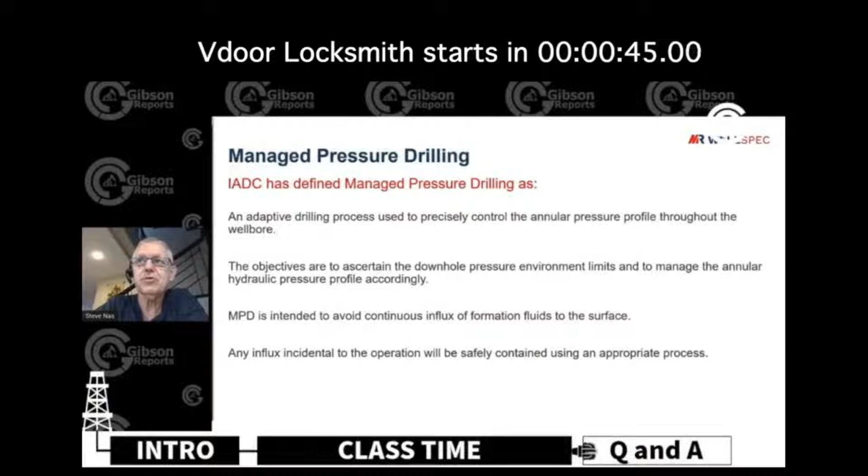The key is being transparent with our clients in this case. So tell them what happened. If we had a failure, tell them exactly what happened. Whether it's our fault, whether it's whatever the issue was, we need to be transparent.

I think it's very important for everyone in the industry to know what's out there and kind of what's happening downhole as well. I've probably worked on over 40 different performance limiters in my career. If I miss any of those, and the computer is raising weight on bit, I have a train wreck. The computer's going in the ocean.

Here's your new colors, here's your new thing. We don't do that at all. Here's the tattoo you need to get. Yeah, here's the tattoo. Sorry about the last one. We used to fake that all the time.

Hello, everyone, and welcome to the show. This is the VDoor Locksmith Show, where we are unlocking the secrets to success in the oil and gas industry. One interview, one technical presentation, which is what we've got today, and one technical screw up at a time.

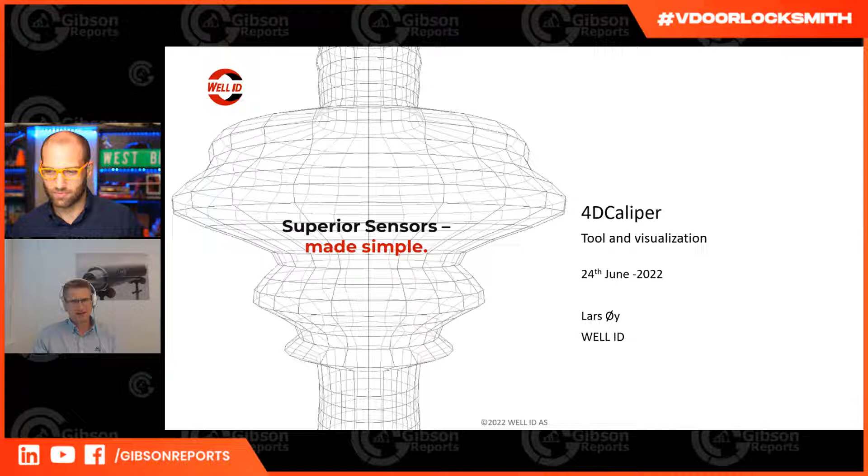There we go. Yeah. So I'm from Well ID. It's a company started 6 years ago, and we are working with LWD sensors. And the idea behind WellID started in 2016. I was working with rig technology, and I thought, what's missing in the LWD market? I'd been doing LWD and directional drilling in the past, and what I always thought was missing was calipers. There were so many simulating a borehole, discussing and using gut feeling, but hardly anybody measured it. And especially for big boreholes, there was nothing at all that actually worked.

And then intuitive visualization of logs. There were scribbly lines, and people were complaining constantly about the logs. They were hard to read, hard to understand, and again, people were rather using their gut feeling instead of trusting the sensors. So what I always heard was that only big companies could develop a new sensor, do something new. And I thought, I think they're wrong. Let's just start WellID and beat the big companies in new technology. So that was back in 2016.

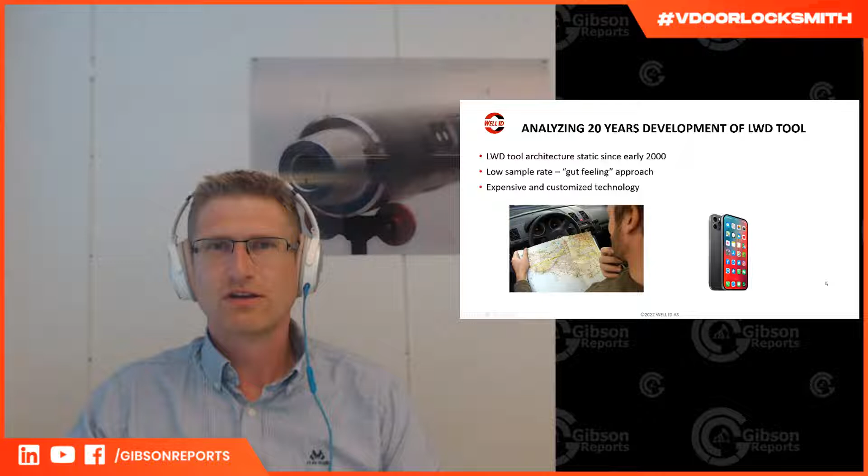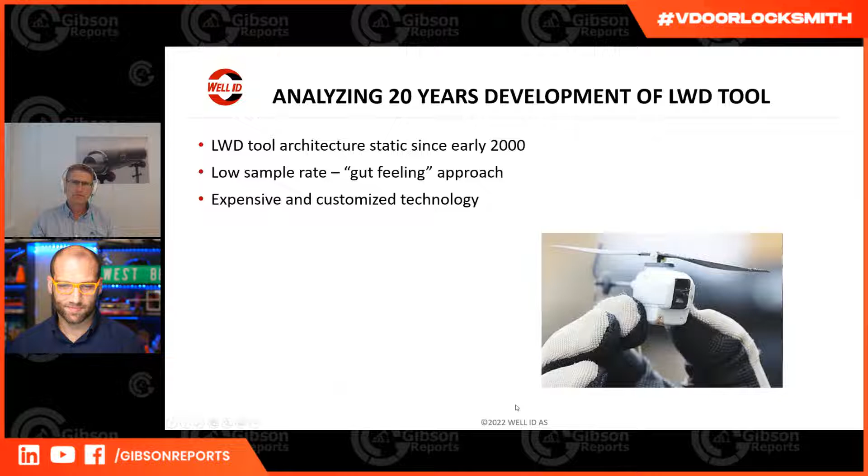And that was the approach we had. This was how it was done in 2000, and now everybody uses GPS and cars start driving by themselves. And then you have the drone industry, aviation, space, medical, car. They all acquire sensors that are accurate, reliable, can handle harsh environments, low cost. So there's no need for the downhole industry to customize, to develop themselves. And that was the approach we had for thinking it's possible to do something new.

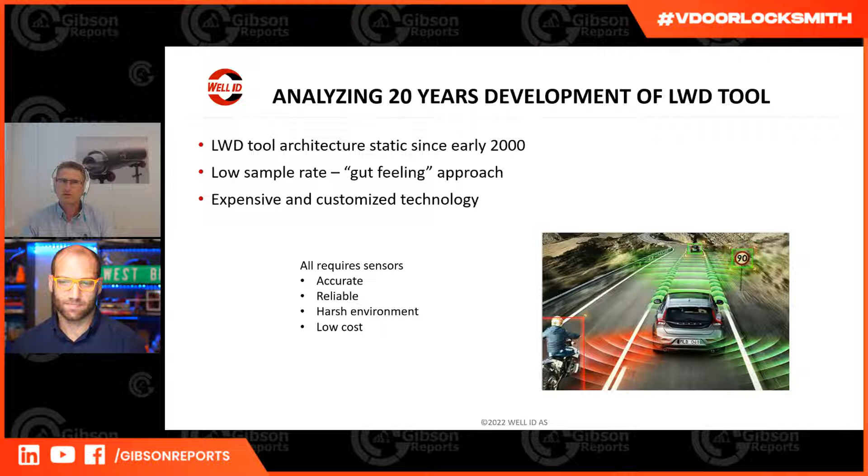And then how to make an LWD caliper and a new visualization. We combined lots of things that we could find. That was the first approach, and then cooperate, find people we could make a win-win with, and then we had to develop the rest. And so far that's been a successful approach. If we had tried to beat Schlumberger with 100,000 people, we would never succeed. We had to rely on finding off-the-shelf solutions and cooperate, be flexible, be agile.

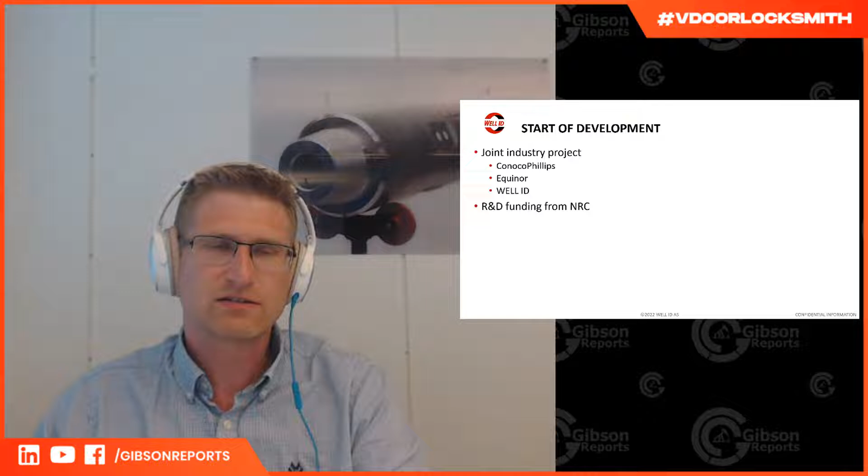So when we started WellID, it was a joint industry project. We got ConocoPhillips and Equinor supporting us, both financially and technically, and we also got some research funding from the Norwegian Research Council. The support from the oil companies also proved that they thought our value proposition and the need for the caliper was real, because lots of startups develop something that industry actually doesn't need. I think that was very important, to see that they saw the same value proposition as we did.

The caliper is a radar-based LWD caliper. It's for 12.25 to 17.5-inch boreholes. It has its own battery and memory, so it can be put in any BHA. The sample rate is 100 to 200 samples per second, so you easily get into gigabytes of memory instead of the kilobytes that used to be the standard.

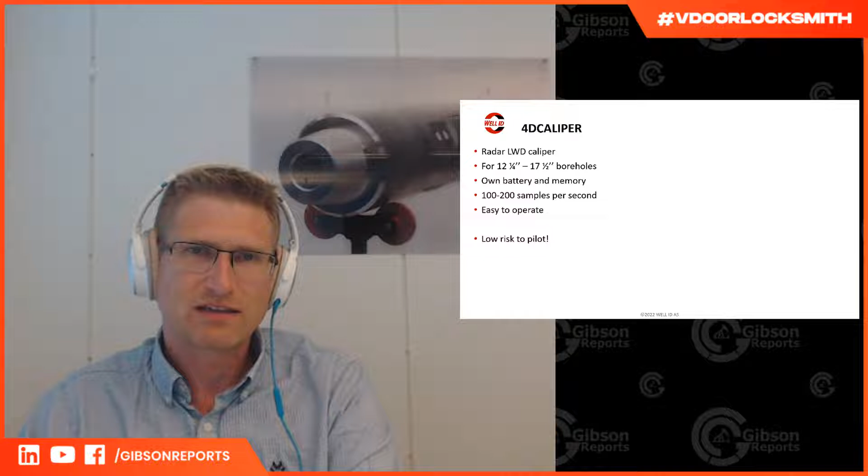It was always an aim to make it easy to operate. This extremely complex tool that you need long manuals and in-depth understanding to operate, I think that's history. One very important aspect for us was to make it low risk to pilot, because if it had been high risk to take the first run, no one would dare to send it downhole, and we would just end up with a tool on the shelf.

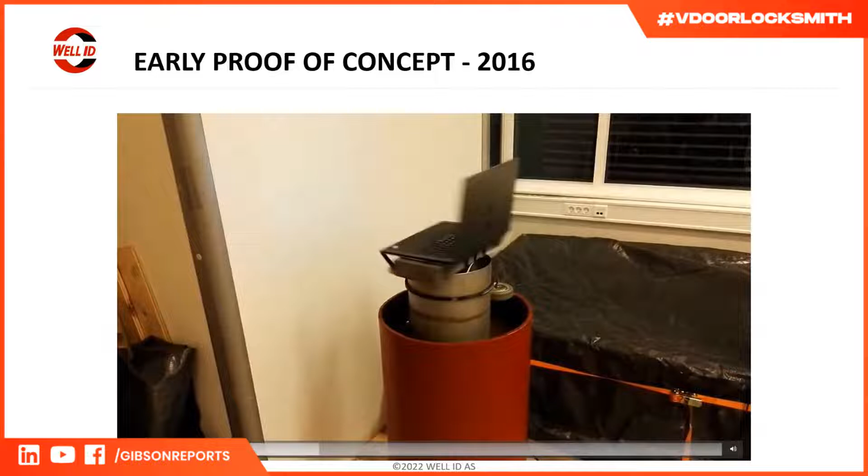I found a video back from 2016, and that was before we had any downhole electronics. We had a radar sensor, and we made a mock-up of an LWD tool, put that in a casing with mud, hooked it up and got measurements. Of course, there was a big discussion about whether we could fit a laptop down this LWD tool, but we just used gaffa tape and put it on top. So the principles were the same as today's tool, but the wrapping was very different.

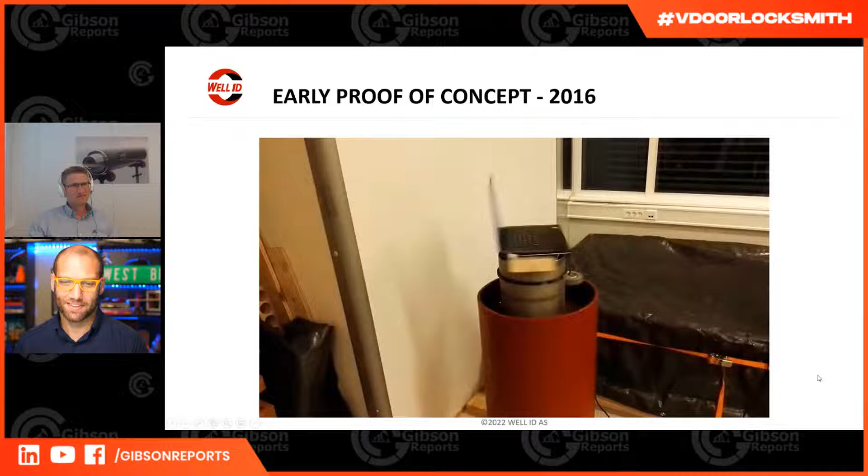Here you see some of the development phases that we have been through. The first proof of concept was a little more sophisticated, put in a clean workshop, and then we got attention and support for further development. Then it was into making the LWD tool and running it on a test rig onshore in very gentle conditions. The final phase was sending it into a real, challenging well with high pressure and high vibrations. That was the last development phase we had on the hardware.

So just shoot in if you have any questions. I'm always interested in discussing these things.

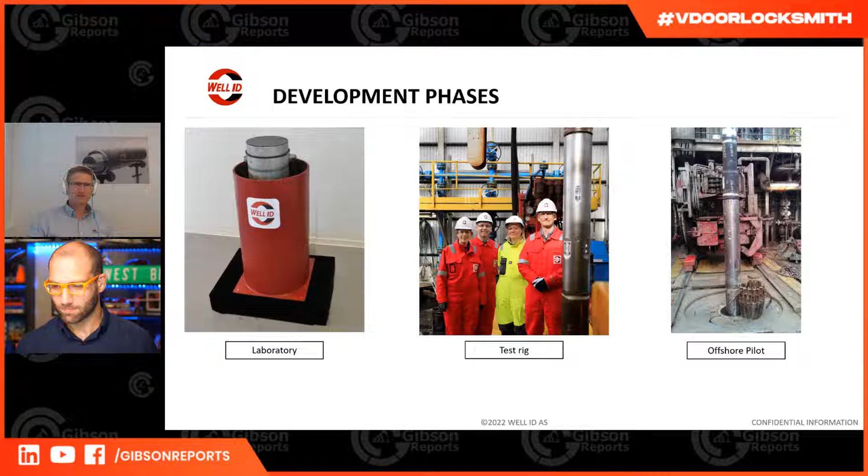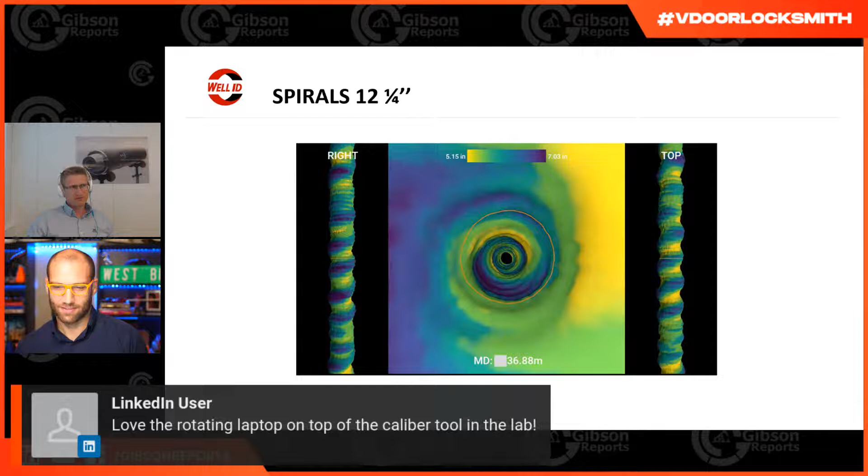This is measurements from a 12¼-inch section, and it was very surprising to see all the spirals here. It was anticipated that there could be spirals, and I've heard about it in the past, but seeing it, measuring it, and seeing different sections have different spirals was just an eye-opener. In this case, it was drilled with an RSS tool, and when they were building angle, there was a different pattern than in the tangent section. So we see how different tools and different bits behave. We can nail down the commands they send to the RSS and see how that creates a response. So it's very interesting to see the downhole picture.

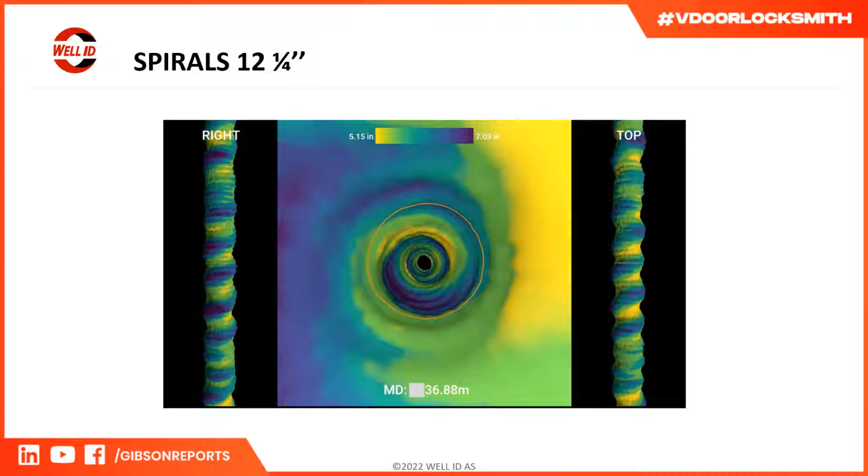Among the spirals we see here, there's one that is 95 centimeters long. Sorry, I've been a little out of imperial units now, but around 3 feet. You can see that as a small edge here, and that relates to the bit to first stabilization point on the RSS. Then you have a longer spiral around 7 to 9 meters here, and I think that can be related to the cruise control or hold function on the RSS. Lars, how far is it from peak to peak on those? What was the distance?

Peak to peak we have a quarter inch on the small ones. So it's not a big spiral, but this adds friction over time, and it adds a lot when you have thousands of feet. Then what is the consequence of this? You can run liner through here, but as you get deeper and deeper, friction increases, and then you'll ultimately stop. So when we see all this pattern, we wonder how far you could have gone if the bore had been straight.

And we also see there's so many simulating on this that don't take the geometry into account. They probably add a friction factor and they fudge that to fit the torque and drag. But I think it's the wrong approach. I think the right approach would be to have the geometry in the calculations, and then the friction factor reflecting the friction between the formation and steel, not compensating for geometry.

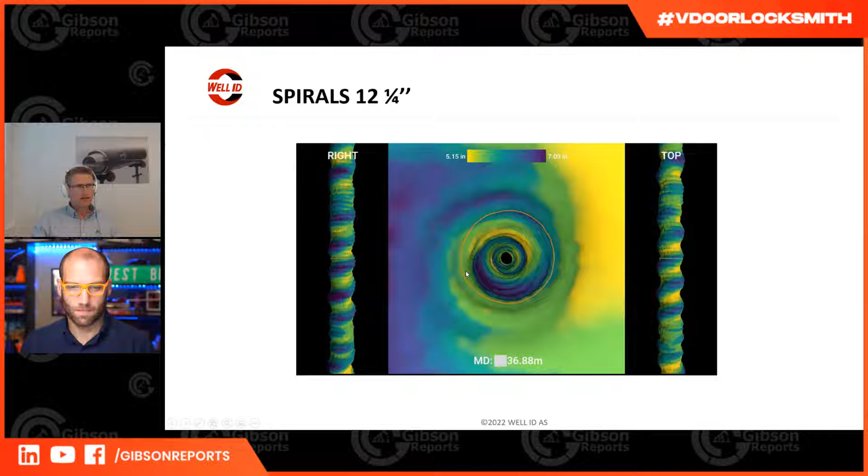And this is a 3D view that we have made. And this is an odd one. You can see it as a video. This full screen. Yeah. So if you scroll fast, you see the spiral going there in a circle. And then you see the smaller ledges.

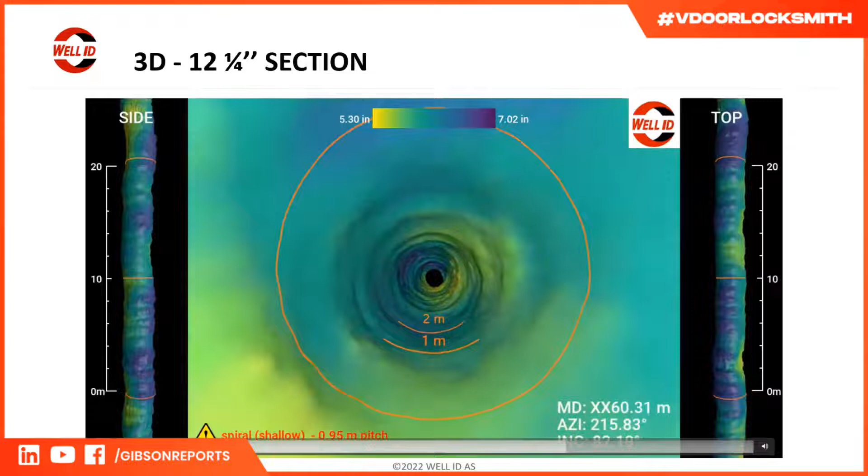This is work in progress in the visualization. I'm constantly doing updates to it, but we have, for example, put in a small scale here. This is your point of view, and then you have 1 meter, 2 meter into it, so you can correlate the spirals. So here you see slightly less than 1 meter between the peaks here.

And we have added in some comments, inspired by GPS in a car. If you have a turn approaching or a roundabout, you get a warning before, like you get a warning that there is a ledge coming. So the thought is then that these are some severe washout and ledges. And the idea is to use this, for example, for drillers when they're running liners and casing, that they can have a roadmap and be prepared before they get into issues.

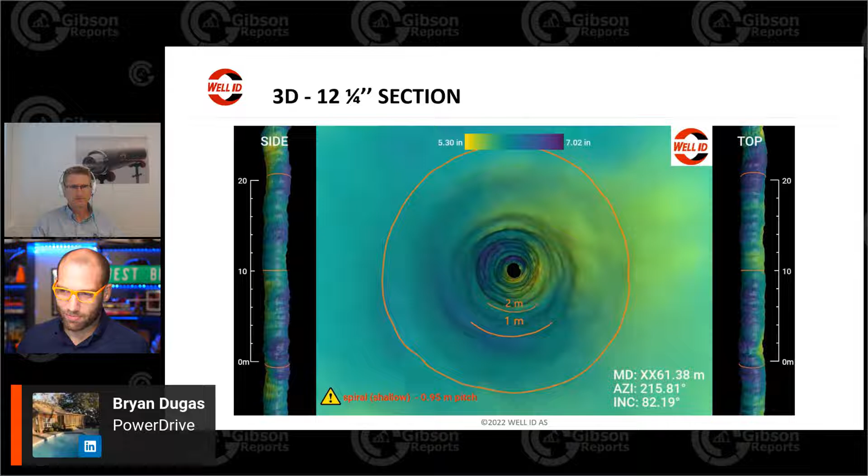We do have a couple of questions coming in, so I know that you may not be able to answer this, but we're going to put it out there anyways. Absolutely. We're acknowledging some of the questions, because technology development means that you have to be under NDAs and stuff like that. So Bryan says PowerDrive, just that. Johnny says, is this spiral from a PowerDrive? And somebody was saying about putting the scale on. There's scales on there now.

Is it a push the bit or point the bit RSS? It's push the bit. This is a push the bit. All right, there we go. But I think you should be a little careful with drawing conclusions there, because we have seen spirals from point the bit as well. It might be that it's more prone to spirals with one system over the other, but we have seen spirals with both.

Okay, here's an excellent question from Bryan, and this might be jumping ahead. Obviously, we've got a lot to cover, and I think this is absolutely fascinating. I love watching this. This is some great stuff.

Bryan says, how long to dump the 2 gigabyte memory? Can it calculate cement volume? Yeah. So first, we got 128 gigabyte memory. So we got a massive memory. What we work on now is to have results in 6 hours, to have a first interpretation of zones that are critical in 6 hours. That's what we are aiming for now.

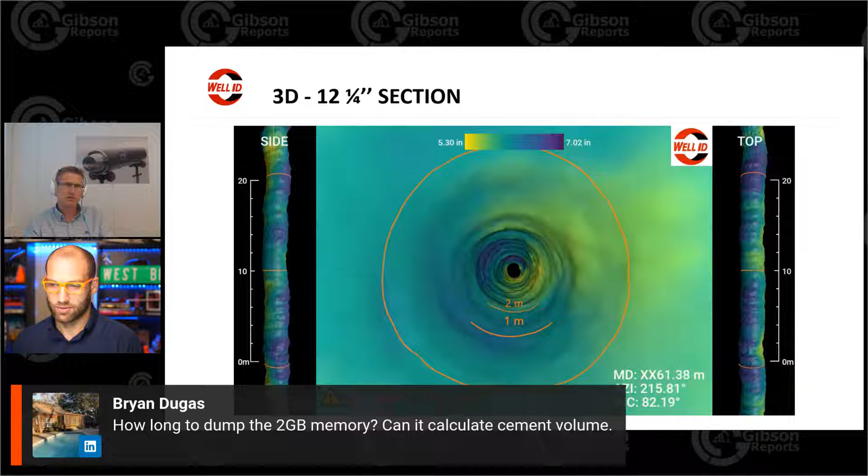We have run 6 offshore pilot runs. We are loading out a new one next week, and we are improving on the processing time. But it's heavy data here, and it takes time to process. And cement volume, yes, it can calculate cement volume.

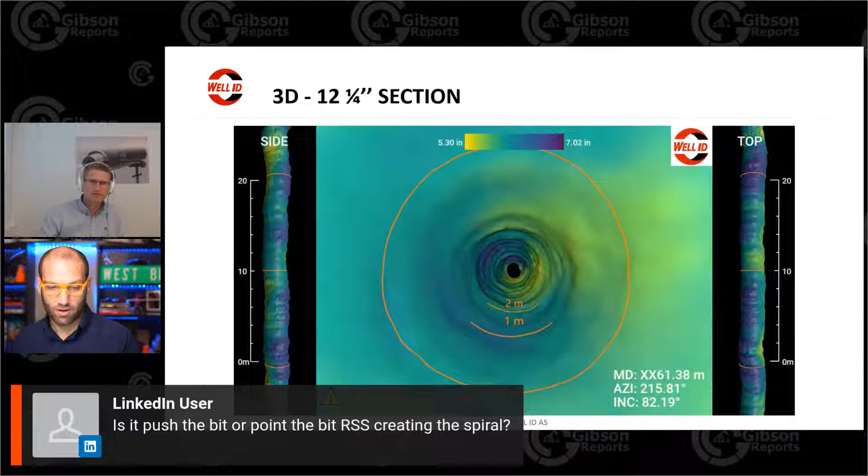There we go. So John had said, is this a push the bit or point the bit RSS creating spirals? And then Johnny had said, yeah, exactly like rotating push pads. So that was kind of the thought there. And John also has a question: have you calculated the effective diameter through the borehole from your data?

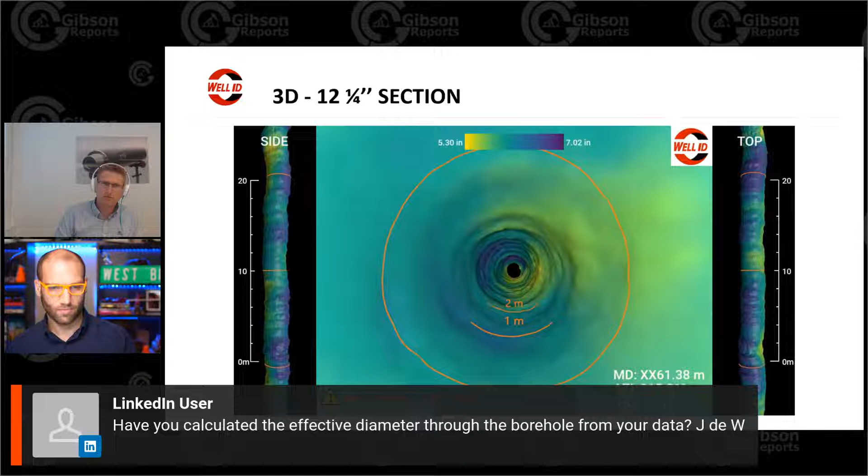Yes, so we have looked at effective diameter both in zones that are stable and those that get more unstable, and it's very different in various zones. But when you calculate cement volume, you can easily get 200 or 300% more than what it should be, because it has such a high effect when you have washout. But it varies a lot.

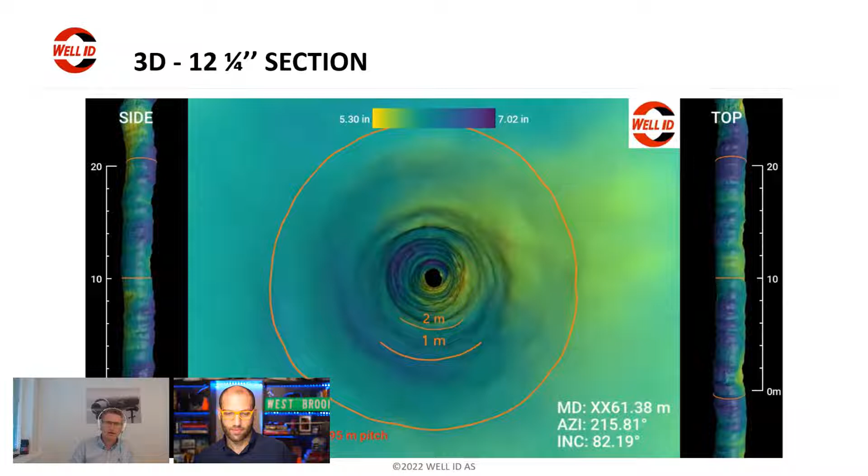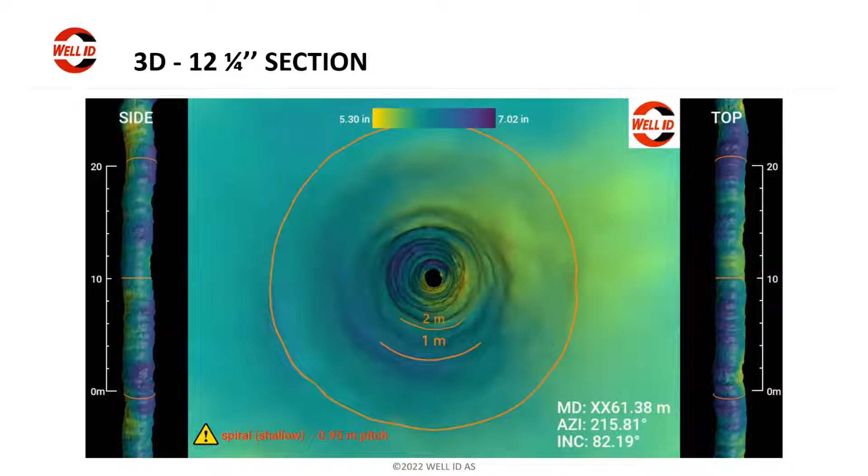Some zones can be very stable, and we see a lot of difference with lithology. Some interbedded formations where you can have stable sands, then you get unstable shale, and then you're back in the stable sand. And when you then try to get out, you can get pack off in the sand formation typically and washout in the shale.

Wow, fascinating stuff. And this is just the first video. All right. Oh yeah, more.

You often get stuck in this zone, but it's also important to see how a zone can collapse, and is it then stabilizing, or does it continue to grow with more and more cavings or washout? And then also understand when it is collapsing, what's causing it. Is it a mud issue? Is it mechanical? Is it pressure? What is causing it?

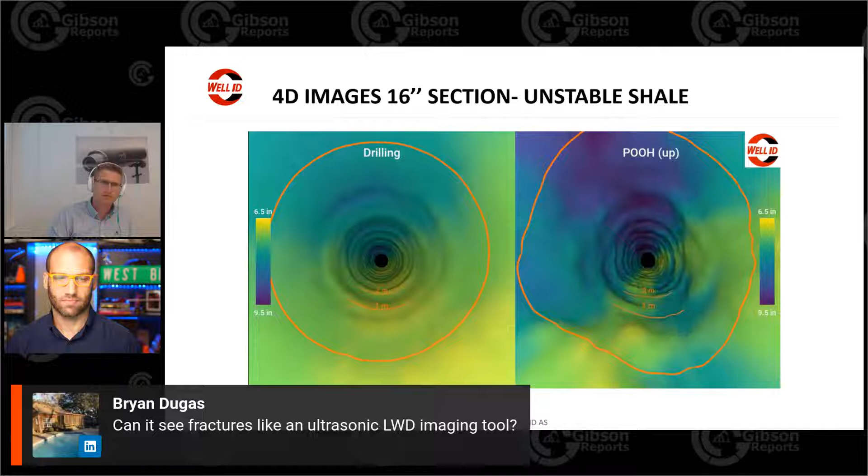Can it see fractures like an ultrasonic LWD imaging tool? We have seen some fractures. We have not focused on it during these runs, but we have seen some, yes. It depends what you are prioritizing. So we have prioritized caliper, but some big fractures can be seen on the caliper image, the time of flight image. Okay.

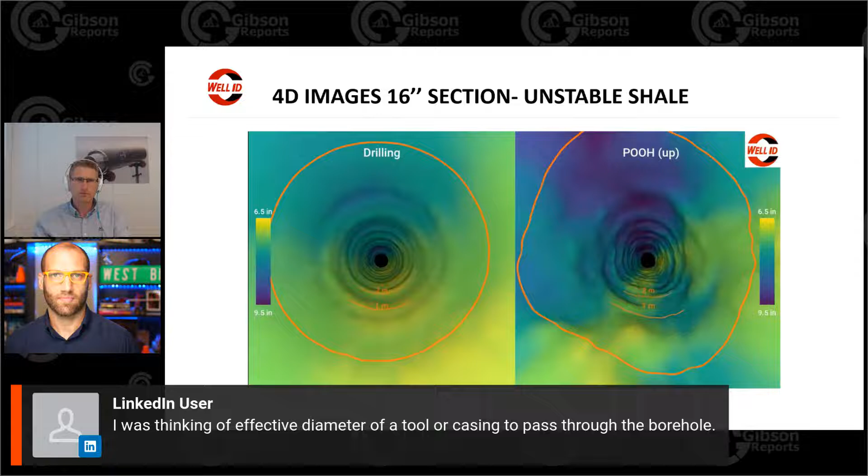John was going to clarify. I was thinking of the effective diameter of a tool or casing to pass through the borehole. Yeah, we have discussed this a lot, and it's not straightforward to answer because you have so many spirals, and then you have local dogleg in addition.

So depending on how you have your stabilization, how your local dogleg is and how your spiral is, you can create scenarios where you can get a lock in the BHA, so you can lock yourself from passing through a certain zone. The diameter might be okay, but the combination of spirals and doglegs, especially local doglegs, can be very critical there.

So we are now working with oil companies to find new ways of categorizing holes, to make KPIs and new methods for predicting these scenarios or make effective diameter. So would it be something where you say, over this 5-foot range, here's the average effective diameter? This is what it is for 5, this is what it is for 10, and this is what it is for instantaneous, almost like ROP.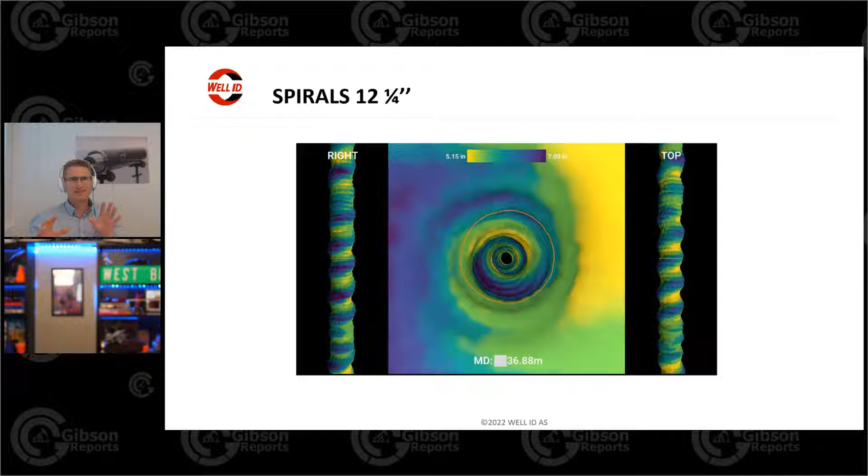Yeah, exactly. So if you have a packed assembly with lots of stabilization points, then you can get through a certain zone. So depending on your stabilization or liner, you can calculate what you can go through.

Okay. So I know we're keeping you from the presentation, but I love the fact that everybody's asking questions. So this is great stuff.

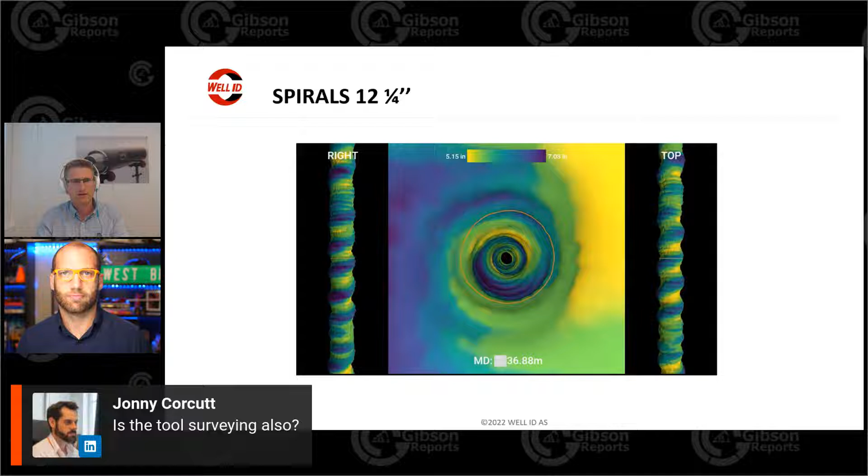Absolutely. Jonny asks, is the tool surveying also? So we can calculate inclination, but it's not survey grade inclinometers or magnetometers.

Okay. Oh gosh, all the questions are really coming in now. Great stuff, guys. Keep them going.

Do you have to rotate on the trip out to get the 4D? Yeah, to get these kind of images, you need to rotate. If you're just pulling, you get 4 lines, and we have 4 sensors 90 degrees apart, and that allows us to get something similar to a 4-armed caliper.

So far, it's been focused on getting the details, and going forward, we can then see what we can read from a 4-armed caliper. I think if you're just pulling through this area, it would be hard to convince people about what you're seeing, because the images were so surprising. So we have had a high focus on quality, and then quantity comes later.

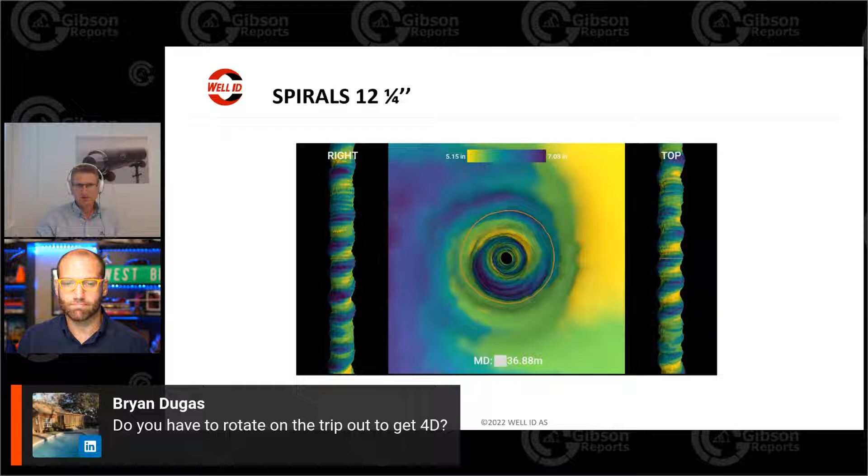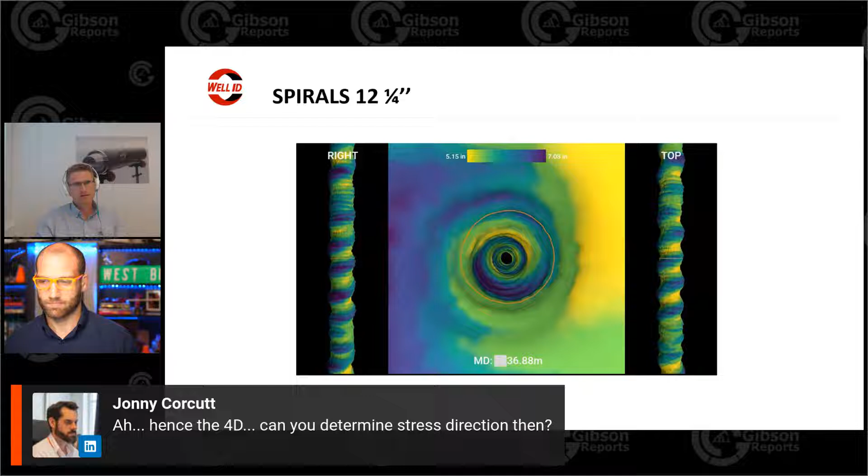And then Jonny says, hence the 4D. Can you determine stress direction then? Yeah, there are so many discussions now with the customers we were running these pilot runs for about what's happening, and is it stress concentration, what is causing the change of borehole geometry that we see in the shale. So it's likely related to stress direction.

Sandy jumps in here. He says, Lars, also downhole dynamics, which can be extremely eye-opening in terms of what is actually happening downhole at the BHA in an extended well. 20 RPM at rotary equals 0 to 600 RPM at the BHA, happening in such fast bursts. It's not seen by the RSS shock sensors. Absolutely. Yeah, thanks, Sandy. You're spot on.

So the tool that we have has a very accurate magnetometer to put the caliper measurements in the right angle, and accelerometers, and we use these for drilling dynamics as well. And we have seen that stick slip is not always caught by the RSS or the company doing directional drilling, and they are often not understanding the response from downhole. And we have seen these really fast stick slip responses can just go under the radar.

And these events are often connected to hole geometry, that you can have a severe stick slip leading you into a spiral, or you can have a high local dogleg that leads you into a spiral. So this thing of correlating data, to look at surface data versus downhole issues, look at downhole issues versus bit design or BHA stabilization or RSS command, I think that's so often the key to improve. We can say that this hole has a spiral, but then the next thing is what can you do to improve? And that's a really interesting part.

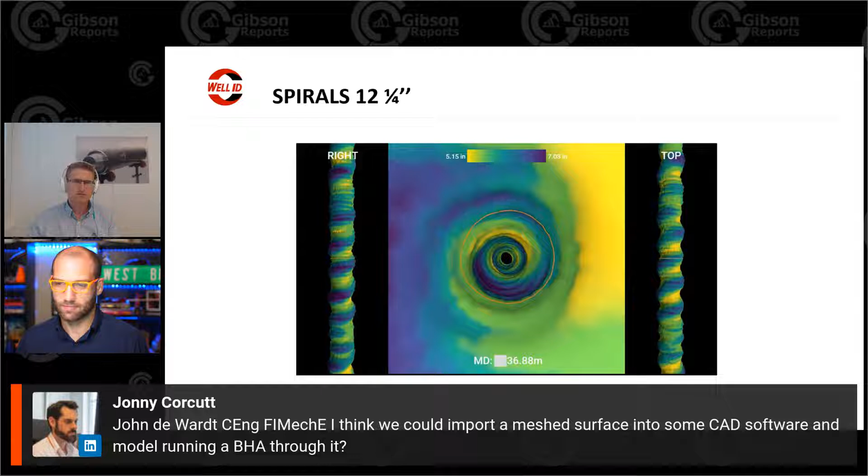Yeah, so we can deliver any format. We have done this ourselves. We have imported into CAD software just to try that out, and that works fine. The standard delivery is DLIS, but we can also make lots of other formats. So absolutely an interesting approach. Can you send me an STL file and then I'll 3D print it? Yeah, we have actually done it. We have 3D printed the wellbores. So next time you can hand out a wellbore.

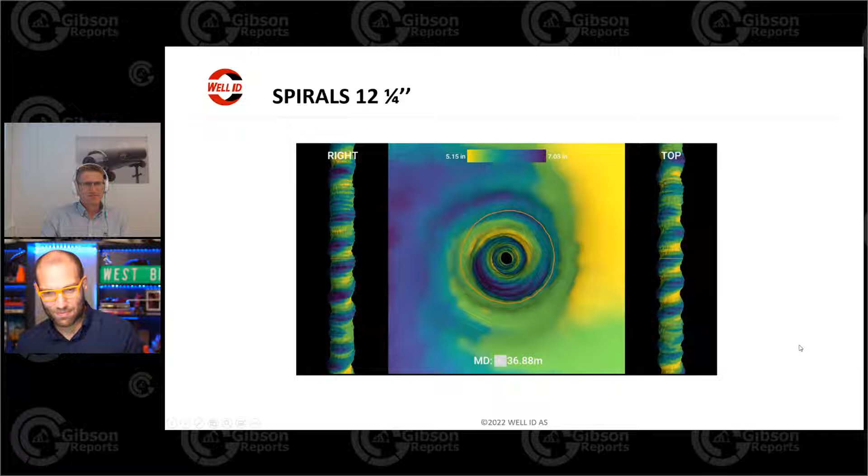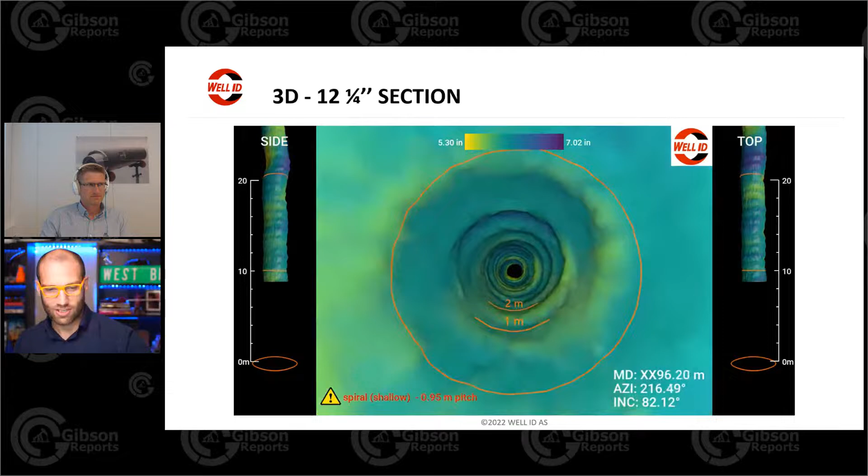Oh, there we go. All right, I'll let you go. We'll keep going a little bit in the presentation. I know you had another one that you were about to show, but lots of comments. Thanks, guys. Please keep commenting and questioning. I can save the comments and questions now on here, so you guys just keep bringing it through, and then we'll cover it all. Go ahead, Lars. Yeah.

So this is a more relaxing 4D. It goes a little slower than the previous, but it's from a 12 1/4-inch section. And it's shale formations that are developing over time. So during drilling, we were 3-4 hours behind in formation exposure time. So we were on top of the BHA here, and the hole looked quite okay. We could still see some spirals that had been generated by the bit and the lower part of the RSS, but when we looked at the relog part, it had changed severely.

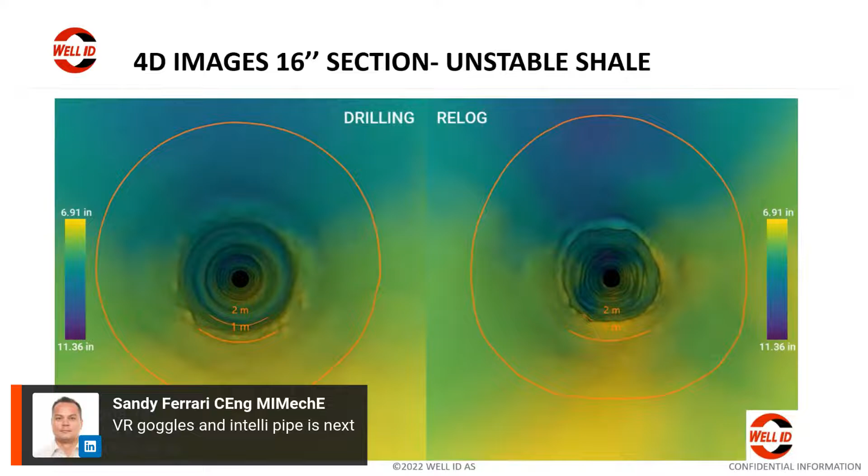So we see that especially the bottom part is getting almost flat, and you get something close to 90-degree corners at the bottom, which is highly surprising. And then this can be used to understand what was happening, because this was an area that was known to give issues. It was always causing issues for liner running. It could be hard to get out here.

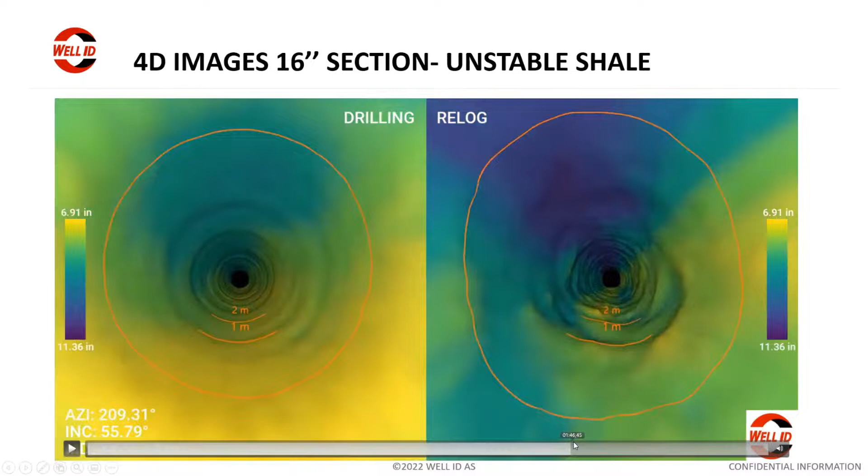And then we can see when this collapse is happening, and also at which angles, which hole shape, and what's happening. So it's currently under analysis with the petrophysics department, and I'm sure they will come to some interesting conclusions. Here at the lower part, there are some really severe washout and change in geometry.

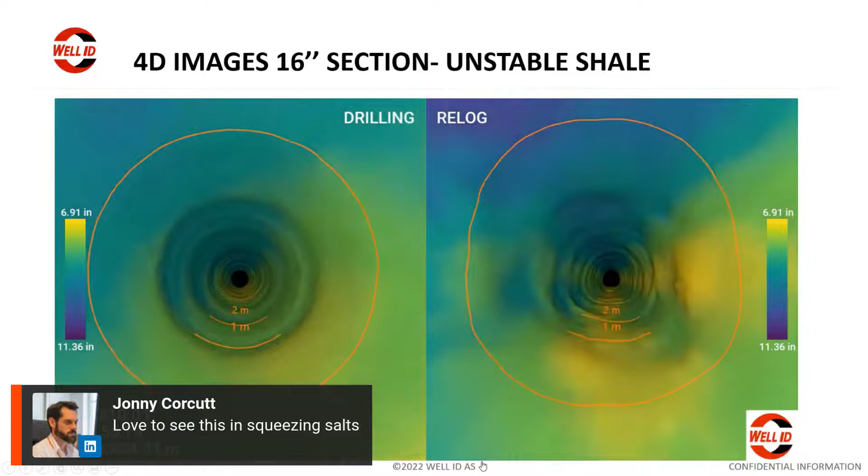But this can absolutely get worse than this. This is still a hole that is possible to get out of. But we have seen other cases where we are almost stuck or are stuck, and then need to jar to get out. And I'll show you some pictures of that later on.

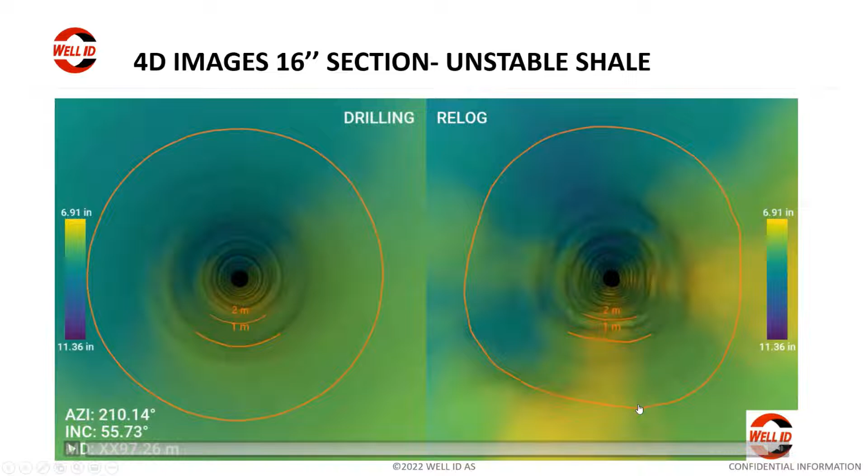So I think technology, sensor is one thing, but the power of visualization should not be underestimated, because it's so hard to read image logs in 2D and so much easier to see them in 3D and look for stress concentration, so look for ovality.

So, often people ask, what about drilling? What about gamma? What about other things? And we are starting to add in information. As you see here, we have the azimuth, we have the inclination, measured depth, and then we are adding in other information as requested to see, is there a correlation between weight on bit and the hole shape? Is there a correlation with torque, or is it anything to do with flow, or what are the causes here?

So, any more questions? I'm ready. So I continue now, David. Can you hear me? Oh, sorry, yeah, my mic was muted because I was coughing earlier. I'm sorry. Leeroy says any preset conditions required or need to be kept in mind before using the tool. Sorry about that, guys. There's my technical mess up for the day.

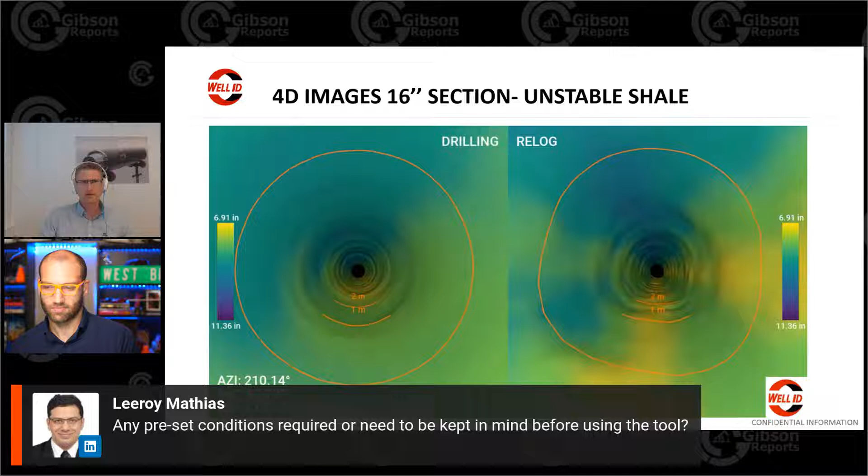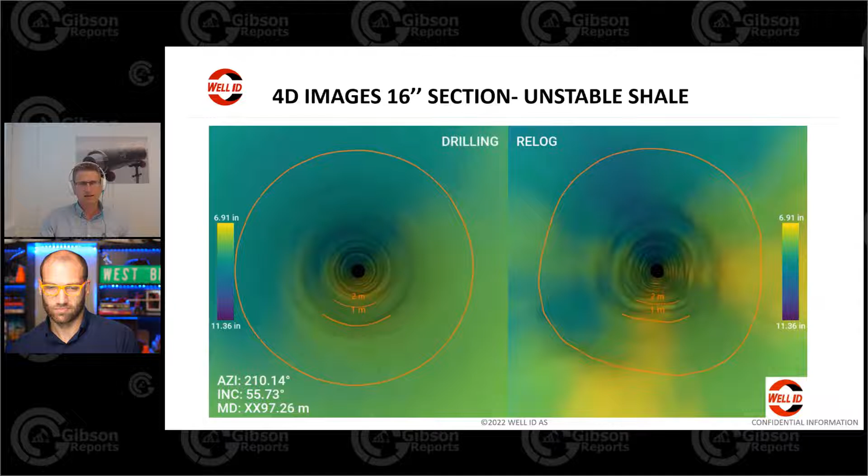Yeah. So the tool we have for big borehole is set up for oil-based mud. We're working on a water-based, but it's oil-based at the moment, and that's also where we see the most issues with hole stability, so we chose to go for that first. It's not dependent on density of the mud, but we are setting up different amplitude depending on the hole size. So a 12.25 would be set up differently than a 16-inch. But it's very little tuning input the field engineer has to do.

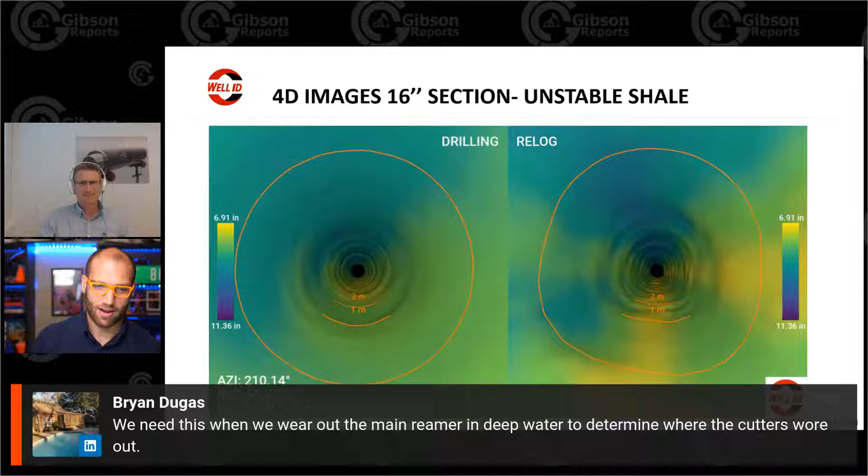And Bryan said, we need this when we wear out the main reamer in deep water to determine where the cutters wore out. Yeah. In some other hole sizes we have seen images of where the reamer is activated, and also at TD. So if you are below the reamer, you can log up and then get a transition between the hole that was drilled by the bit and the hole opened by the reamer. And then you can definitely say if it was functioning, if it was worn out or damaged.

Sandy asks, what we thought were narrow margin, low energy practices were actually the opposite. Slow pulling speed also resulted in jumping of the BHA due to string stretch. Yeah, so we did a job for Sandy when he was in Neptune, and there was so much we figured out there that was different from the global best practice that the DD company had done there. So they were often going low energy, low RPM, and then you saw that resulted in downhole oscillation, awful stick slip, and also when they were just pulling slowly axially, you could have axial stick slip.

And that could be very critical when you were close to bottom, because then the BHA could jump 1.5 meters and cause low pressure. And in unstable shale, that could be the small change in pressure that was critical to cause cavings. So measurements, I think, beat gut feeling in these cases.

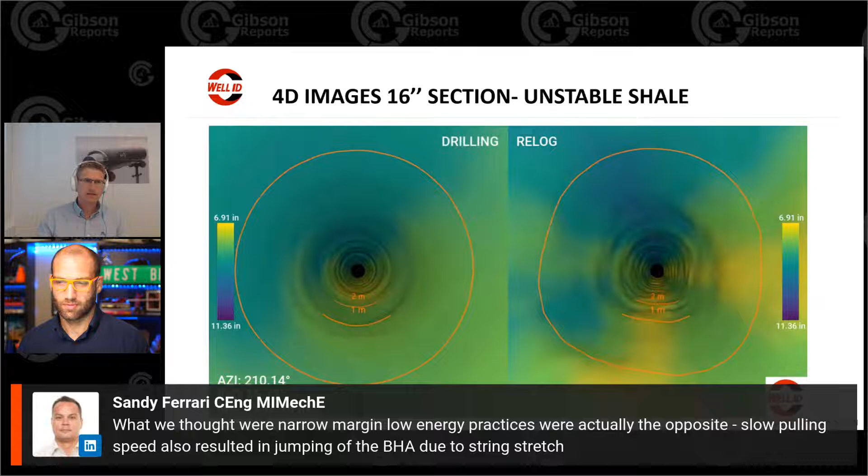So I'm guessing Sandy was a part of running the tool prior, is that correct? Yeah, so that was in a smaller borehole. It was an acoustic tool we were running there, but we were using the visualization and data analytics that you see here. So same data analytics and visualization.

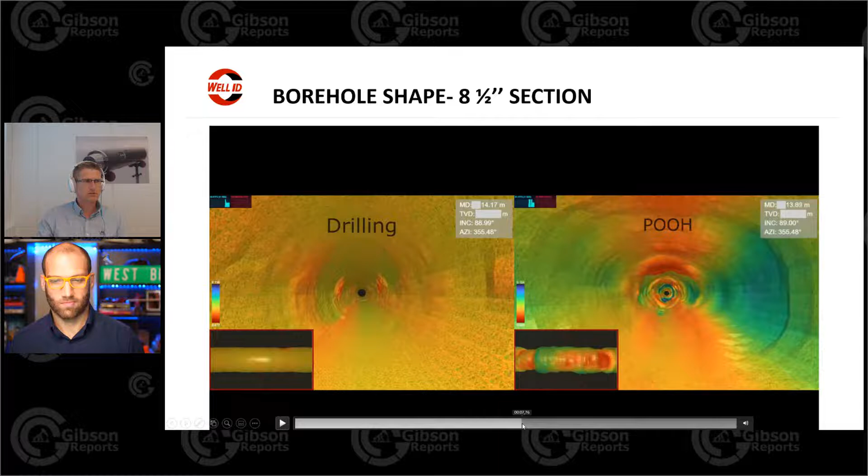So this is from the 8.5-inch section, another tool. But it was from the 3D view here, you see cutting beds on low side, and then this is an area where there was a pack off, and it was very interesting to see how the hole was good while drilling, but it all changed when pulling out the hole.

And then this is an example of key seating. So here the pipe had made a groove. You probably had a loose shale below, and then you got into firmer sand, and things packed off, and the pipe was making a groove here. And of course, trying to pull back in this was very hard. Managed to get out the hole then, but it took a while.

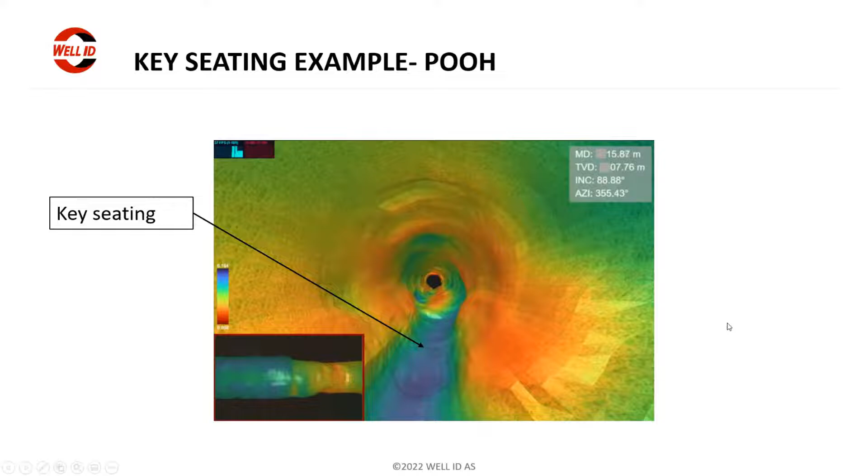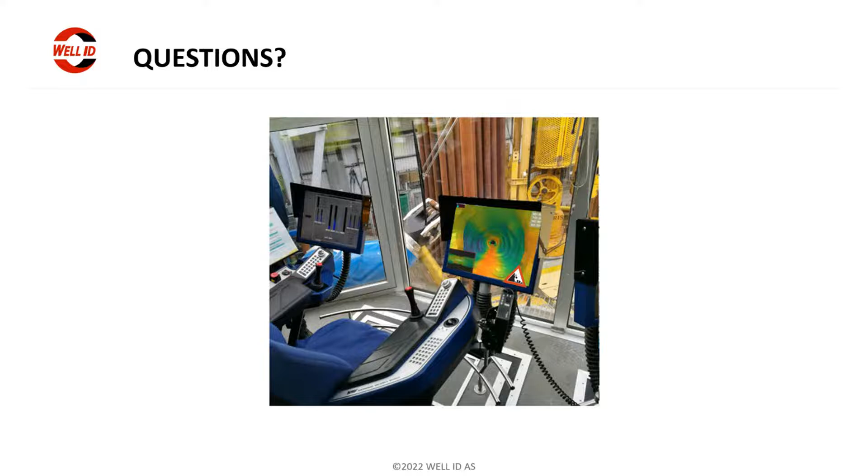So this shows some of the visualization, how we think it can be done in long term. A picture means a lot more than words. Scribbly lines are very hard to read. But humans are so good at reading pictures, understanding pictures. All right. So that was the presentation I had, but I can always show some more images here.

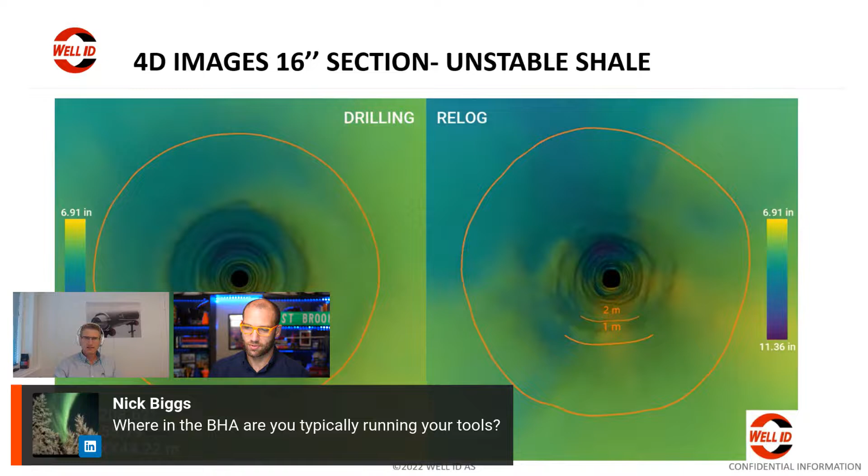Well, we've got a couple more questions that have come in. Let me go back over here. Nick asks, where in the BHA are you typically running your tools? So we are normally on top of the DD company's BHA, since we have a straight bore, so there's no electrical connection from the DD company going through our tool. So we are then close to the top string stabilizer in the BHA.

And we are discussing to get it real time with wired pipe. So we are working with wired pipe vendors to get it real time. It would be very cool. So hope to see that soon. Excellent.

And this is from Robert Estes, who's also, I guess, LinkedIn user 2.0. What % of rigs that would run this 4D caliper service would also have the capability to rotate when tripping out stands?

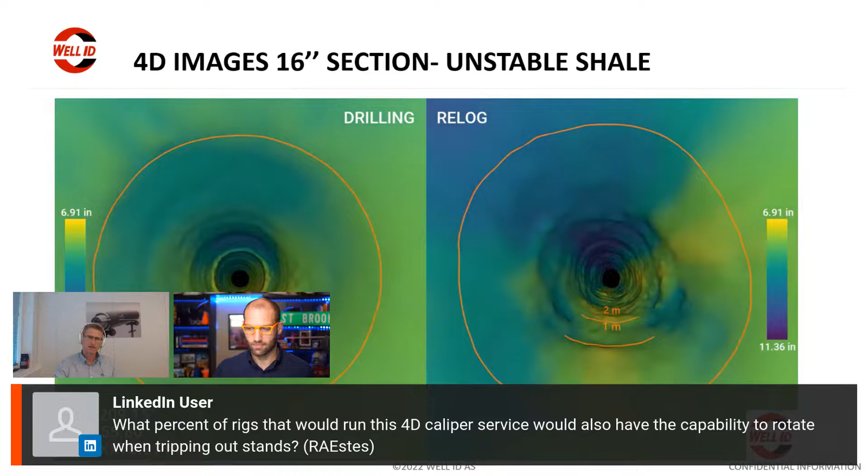Yeah, we often get this question about how can we rotate out. You can get data without rotation, but if you have a big issue, it can be worth it to spend some time to relog some areas. You don't need to relog the entire well, but if you can pick out some zones, that can give you very valuable insight that you will save quickly on your coming wells. But it's a valid question, a good question.

So Brian says, so you could see when running casing what the borehole looks like ahead. Yeah, so you can use this almost like a map when you're out driving. You have the map here, and then the road gets closer to you as you are driving. So that's the thought here, an analogy to the use of GPS.

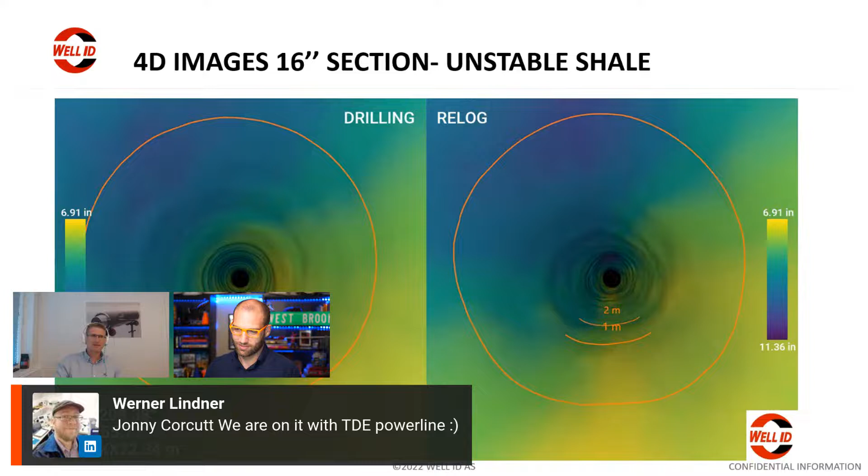And then Werner says, we're on it with the TDE power line. Absolutely, Werner. We look forward to speeding up the integration here. So I think it can be a very good combination.

So I've got a question because of last week's episode. One of the things that we talked about was magnetic ranging and well intervention, where they're using magnetic ranging to do the well intervention. Is there any thought to being able to see the hole opening and pass through in a well intervention setting, where you would actually be able to see the hole you created within the existing hole? Is that potentially on the radar as a use case?

Yeah, we discussed lots of applications that are not directly related to drilling. Lots of completion, sidetracks. You have multilateral wells, and to see what a junction looks like in a multilateral well, or to just get the downhole goggles for how the well looks.

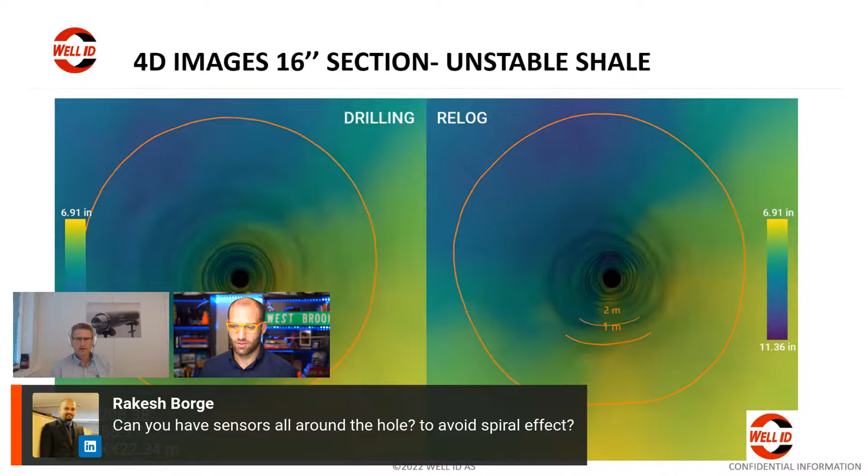So this is a question that came in earlier. Rakesh, hopefully you're still watching. Can you have sensors all around the hole to avoid the spiral effect? We have 4 sensors today, so we can add more sensors to eliminate the need for rotation to get a good image. Hopefully that was an answer to the question.

Okay. And this one's from John DeWart. It says, fantastic technology application. Have you thought through a full value proposition of this technology combined with combined data, survey, logging, drilling that could cause operators to use it as a routine tool? John DeWart, excellent question. Yeah.

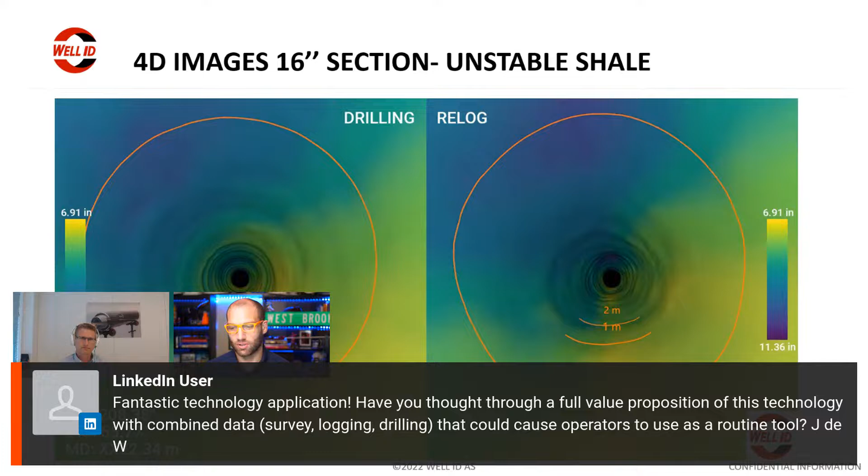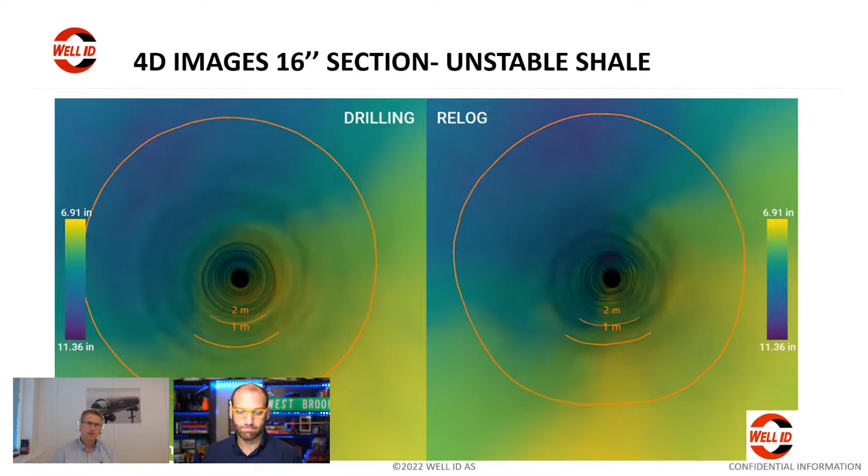And the value proposition we work according to, and the same that our joint industry project partners worked, was to get this used not as a special case tool, but to get volume out of it and get this as big data to look at not only one well, but let's look at lots of wells. So we absolutely aim to get the volume here. We are not there yet; we need to produce more tools to get there.

But then starting to combine data, correlate data, work with it as big data to see what are the correlations. Is there a correlation between spiral and mud? Is there a correlation between rig type or mud? Is it offshore? What does the heave compensation system do to spirals? All these things that you can start to find solutions and improvements on when you have big data.

And then Sandy says, Lars is prepared to go offshore in summer holidays if need be. Yeah. So nice of him to volunteer you for that. Yeah. So we started with running one job, which was hard. Always setting up for the first job is hard. And then we got 2 jobs. And of course, all these jobs come over a vacation. So we got a request if we could deliver a call-out job last summer during the middle of the vacation, and of course said yes. So I volunteered to take that job, and it went fine. Well, there's no such thing as vacation when you're an entrepreneur.